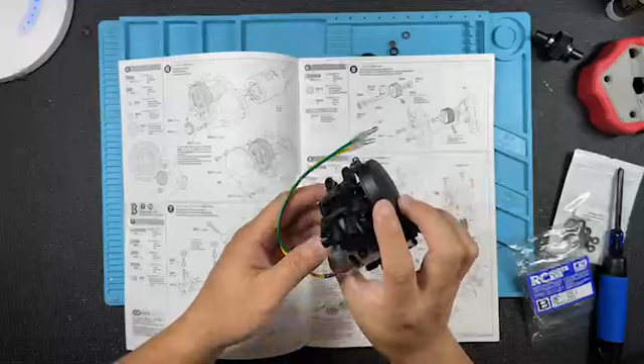Okay, so I want to try to fit everything in the shot. Today, yesterday we went up to step 6. We basically built the rear gearbox, front gearbox, and motor. So this is what we did, steps 1 through 6 yesterday.

Let me try turning on this light, see if it helps. I have one more light today. Okay, so added a little bit more light on this side, so that's good. Let's see if I can drop this down a little bit. Okay, let's get started.

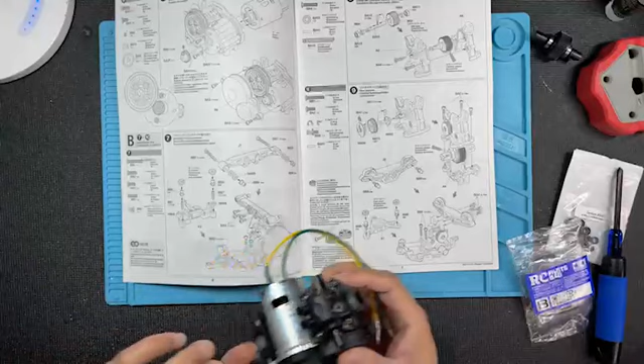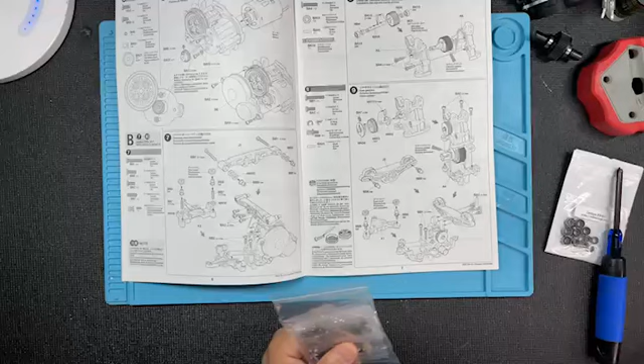So we're gonna start at step 7, obviously. Yesterday we did 1 through 6, so it looks like we're still going to need this, so I'm going to keep this around. Let's go ahead and open bag B. For steps 7 through 10, we're going to use this bag, all of the parts that are in here.

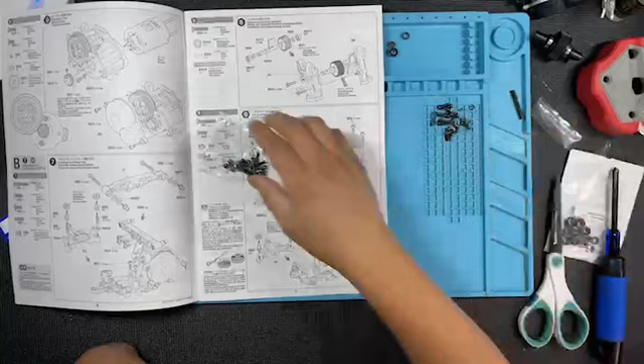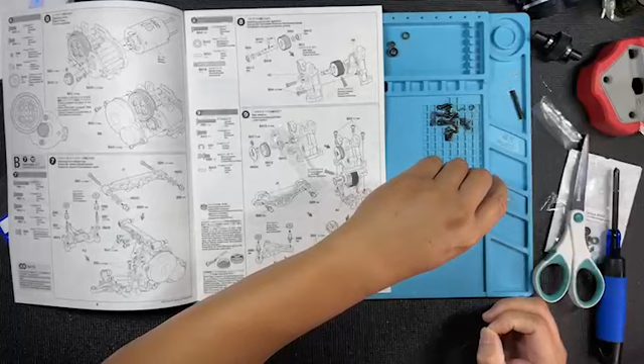It comes with some bearings and a shaft. I know we're not going to need the bearings, so let me just put those aside. These I will put right here. There's a third one. Then all of the screws, let's try to lay them out right here. I'm not sure why they're in 2 bags, so we'll just try to keep them separate, just in case that was on purpose.

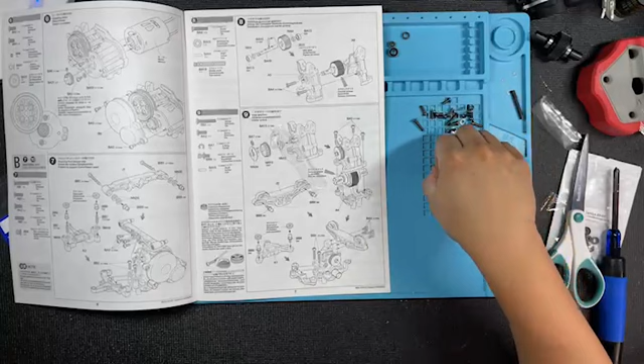Let's see, these are all just regular screws. These have some longer screws. I see some screw shafts, some ball ends, and some nuts. So this bag is a little bit different than the other bag.

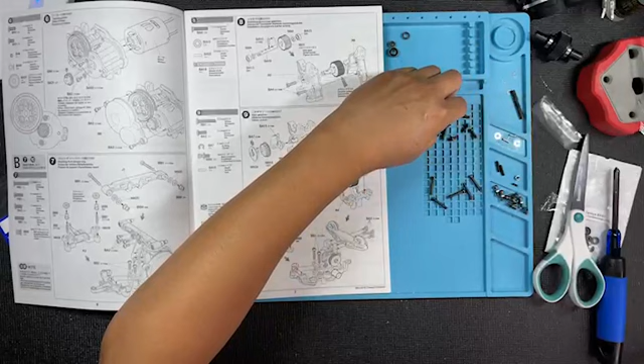All right, I see a couple pins there. If you watched last night's stream, you know that I had a lot of trouble with a couple shafts yesterday, and it held me up for about 20 minutes. But I got over it. Basically, I was using a shaft that was too big, and it turned out there were pins that were a little bit too big, and I couldn't get it into the slot, so it held me up for about 20 minutes. So let's not do that today.

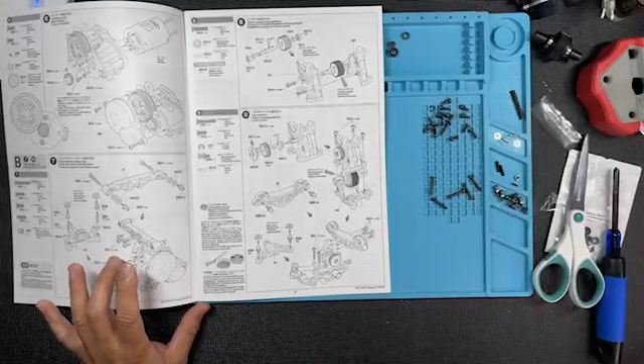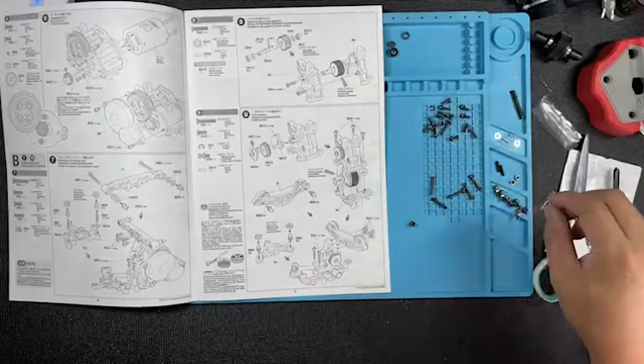So let's start over here on top. Let's find this piece J1, and then I already know what the N tree looks like. Been using that yesterday, and then we're going to need these ball studs as well. So I got the ball studs here. There's 1, there's 2. This is the N tree right here. You can see there's another one. I'm going to try to use up this one first.

And we need 4 NN20s, and that is going to be these 2. I guess it's these 2. NN20, NN20. Oh, well, I'm going to need 2 from each tree, it looks like. So there's that, and these two right here.

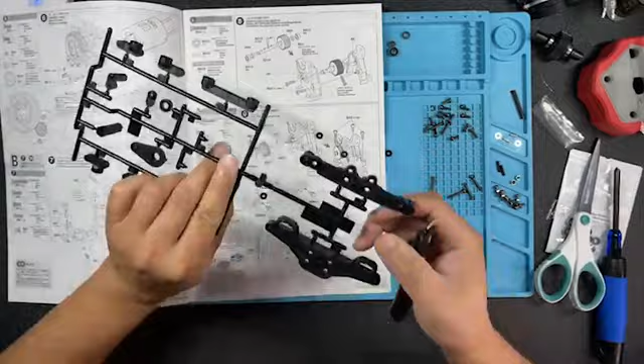J1. Looks like it's gonna be, is this the J tree? Let's see, this is the J tree, and one's gonna be this one.

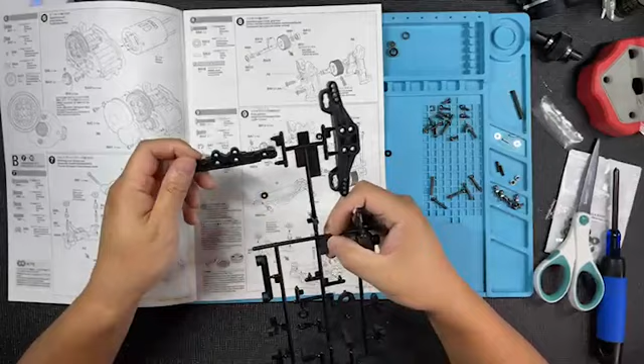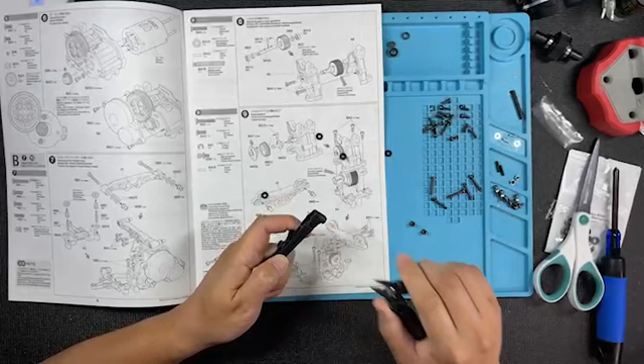Hey Sandwich, how are you? How were things? I went long yesterday. I was trying to finish it all the way to a certain step, and I just kept going, so it went about 2 hours and 2.5 hours.

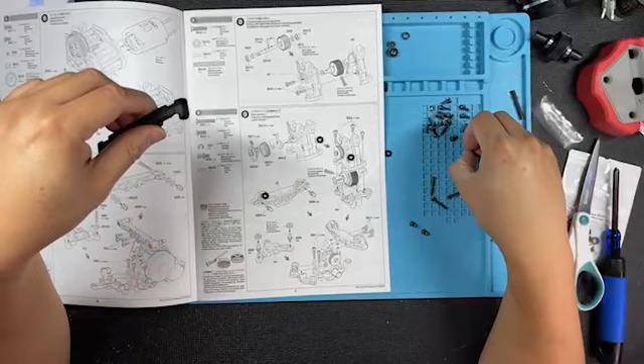Took a while, all because of what happened in the beginning with the shafts. So here's BB1, this screw right here. It's going to go through there. Let me just make sure. I'm pretty sure this is the correct screw. Yep. So it's going to go through this way. I guess it needs to be screwed in.

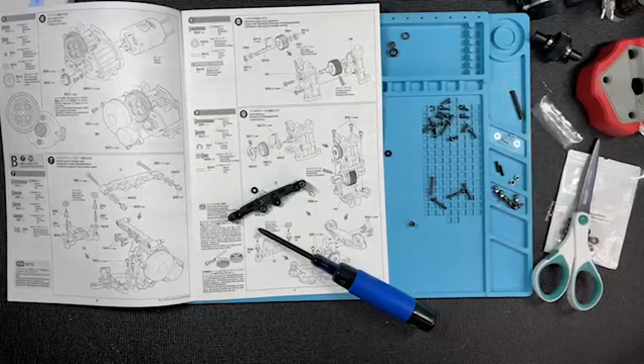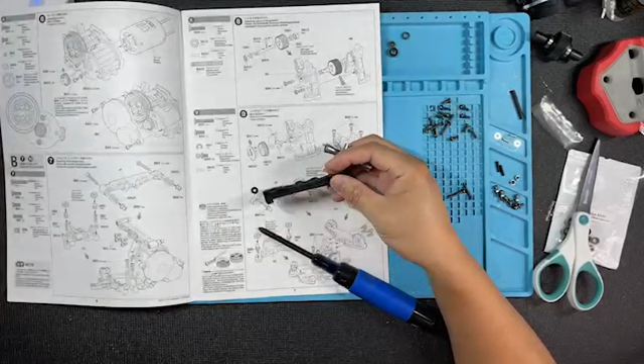So on the other end of that, I'm going to use one of these cross wrenches. It came with one, it's right there. I just have so many of these, every kit comes with one, so I have quite a few.

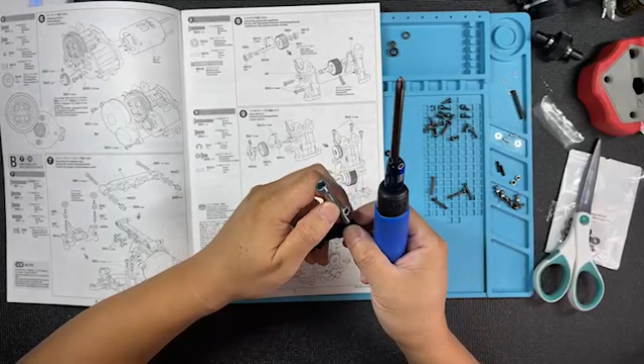Alright, and then same with the other side. Let me just make sure all the bolts are the same. Yeah, there's one that's a flathead, that's a little bit different, but the other ones are the same.

So you got the rustler working and then you crashed it again, or it's still the same as yesterday? Still the same situation. And was the crash your fault?

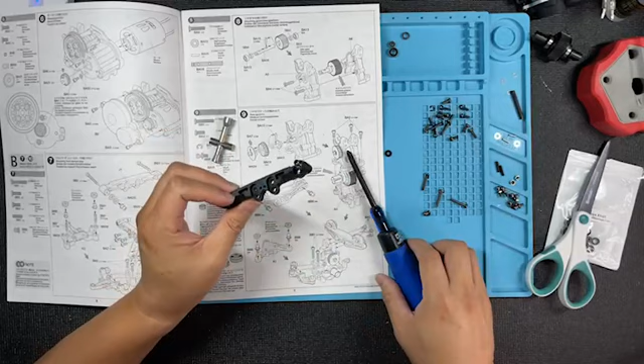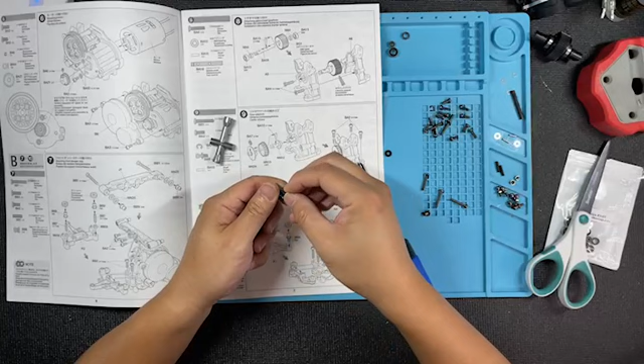There we go. Two spacers. And the ball stud.

There we go. A parked car came out of here. You know, they tend to do that. I don't know why. They should really do something about parked cars. I mean, they shouldn't be able to hit RC cars. I think that happens too much.

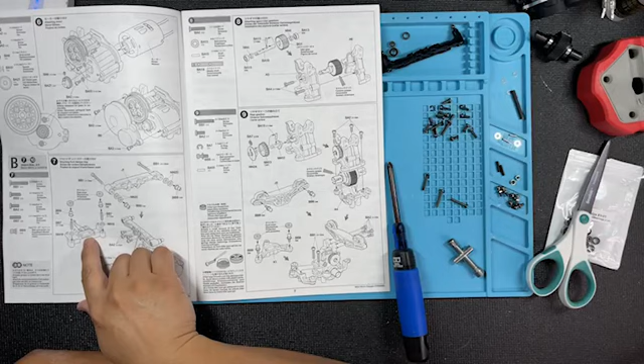All right, put that aside. Now we need K2 and then some other part. I wonder where this is. And a dust cover, huh. Wonder where that's going to be. So we need NN18, we need 2 of those. NN18 are going to be these 2 right here.

Okay. And K2 looks like it's this one right here. Indeed it is. Alrighty.

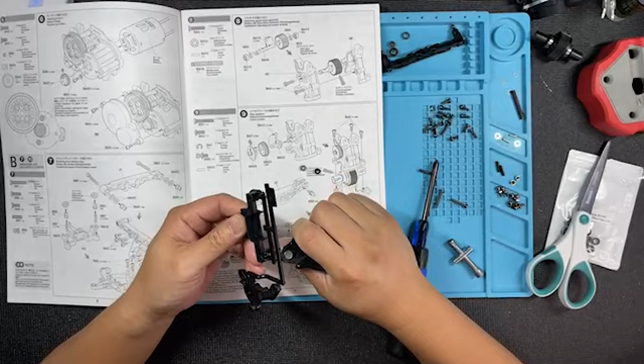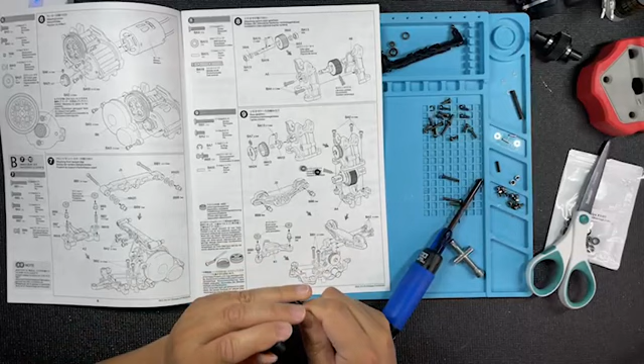So let's see, we're going to use this shaft right here. It's just a screw shaft. It just says screw, but usually screws have a head. But that's okay, we'll just call it what they want to call it. So...

The spacer needs to go on. So this screw has two sides, one end has a hole that is a 1.5mm hex, so you want to point that side up so you can tighten this. I don't know how far I'm supposed to tighten it in, but I'll just see if that's enough.

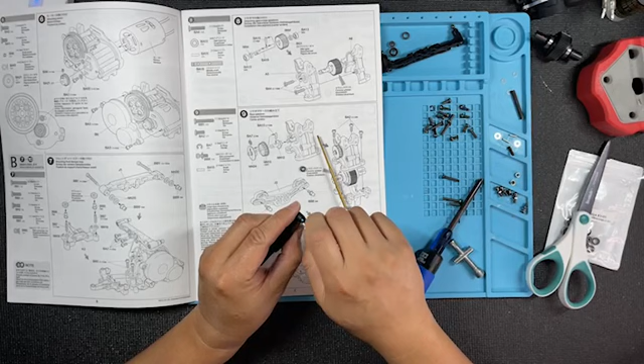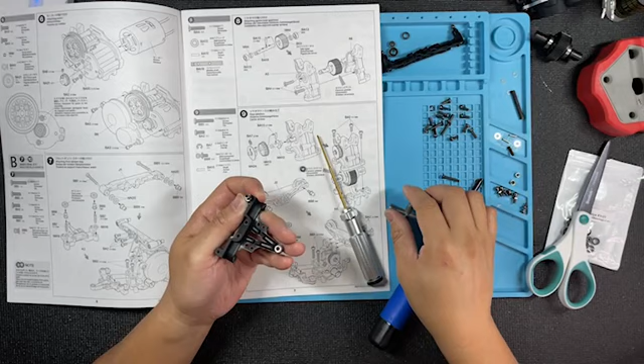And then another one of those ball studs. It's probably close. Alrighty, let's see if I can tighten that. Okay, the screw shaft is not peeking out, so I'm going to say that's probably correct.

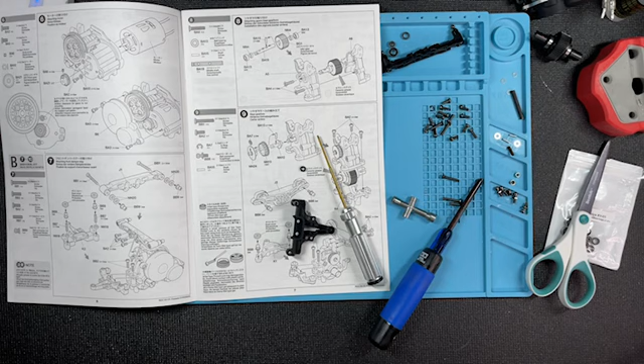Okay, so this dust cover, I didn't see anything that looked like a dust cover. So that's a little bit of a mystery to me. I wonder what those are. Dust cover. I have no idea, I don't remember seeing anything that looks like that.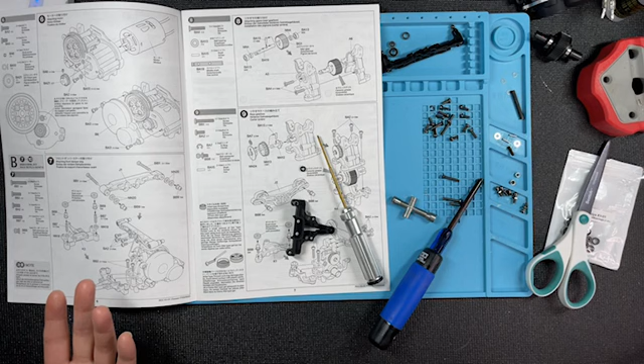Since it is a different shade and doesn't have a part number, I'm guessing it is going to be... oh oops, I put this on the wrong side. I'm guessing it's going to be some kind of foam or rubber rather than something plastic. Yeah, see, I wasn't paying attention and I put it on the wrong end.

So let's pull this out. Again, not using any power tools - anybody can build a kit. And this is actually a fairly difficult kit, so it's a little bit of a challenge.

But so far it's been kind of a fun kit to build. A lot of quirks, a lot of things I haven't seen before, which is interesting to me. All right, like that dust cover, I have no idea what that is, and I don't see anything that looks kind of like a dust cover.

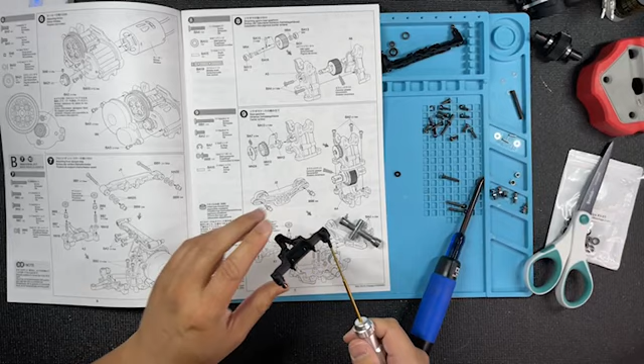Sandwich, you have any guesses what this might be? It's these two kind of spacer looking things. It's a little bit shaded gray and there's no part number and it says dust cover. What do you suppose that is? And where might I find it?

Alrighty. I wonder if it matters that it's there. Is it functional or? Wonder what it's going to be. Let's see.

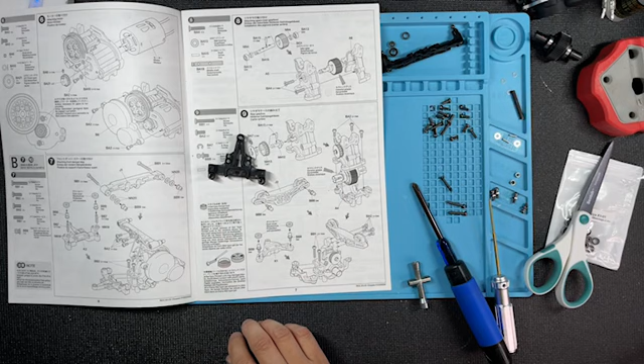Apply grease to screw tip if the fit is tight. Okay, that doesn't help. All right, we'll figure out what those are later. So right now, let's grab the front gearbox - see, it's so small on my end.

Foam rubber piece, yeah, that's what I'm thinking. But I don't have anything left from yesterday, so I don't know where it would be. It wouldn't be any of the other bags. This would be the only bag that it could be in, because this bag doesn't have a letter name.

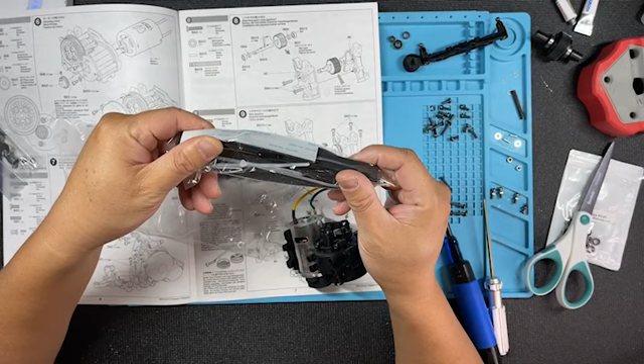So I don't see anything. I guess we'll find out later. Nothing in there. Nope.

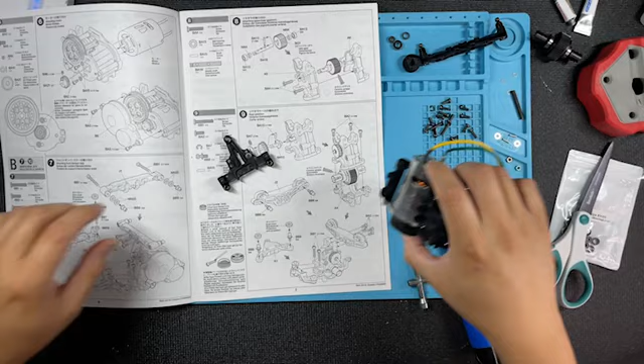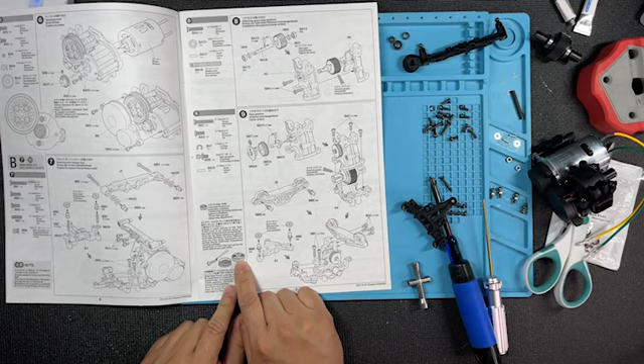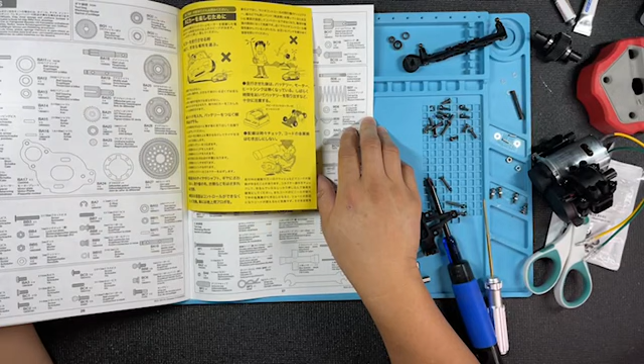I think you missed this yesterday - do you have this? Do you have gel type thread lock? It's called, there's a letter AG on top of the little tub. I don't have one of those. And I looked it up on eBay - our friend, the guy you bought the part from in San Marino, he has that. So I might end up buying one from that seller.

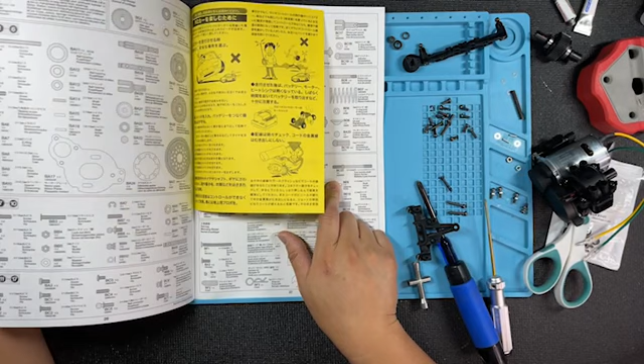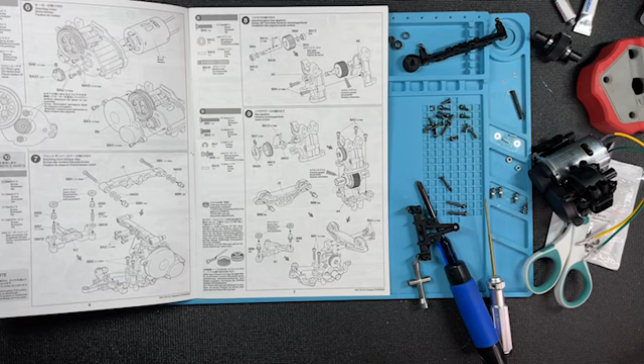Let's see. Urethane O-ring. Gear. Dust cover, I don't see anything that looks... Washer. It's the needle in the haystack. BB6. Huh, oh well. Okay.

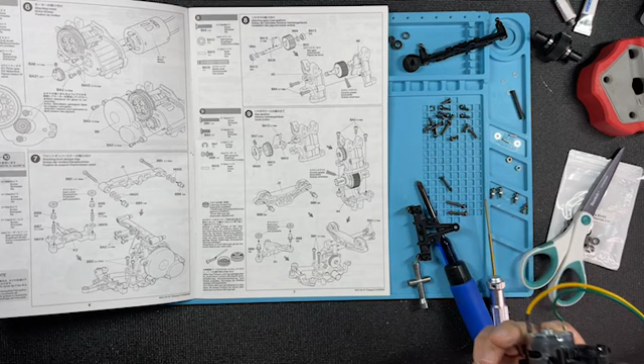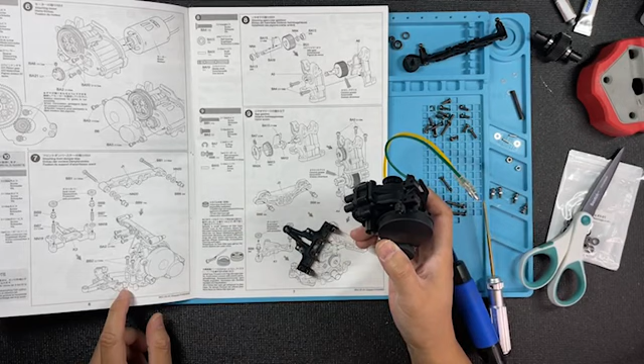So let's grab this, so this is like this. And I was correct, you do sandwich this kind of through here. But you know what, that's pretty prominent, that ring right there. Let me show you.

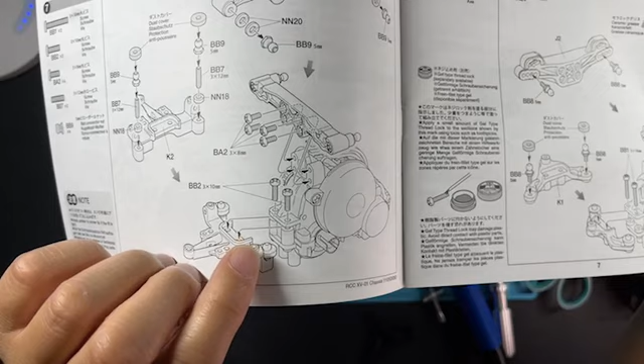So these are the dust covers that it mentions. I don't know if you can see that. Yeah, plenty good. And then when it's on, it goes past the ball stud, the tip of it, and it ends up right there in the collar.

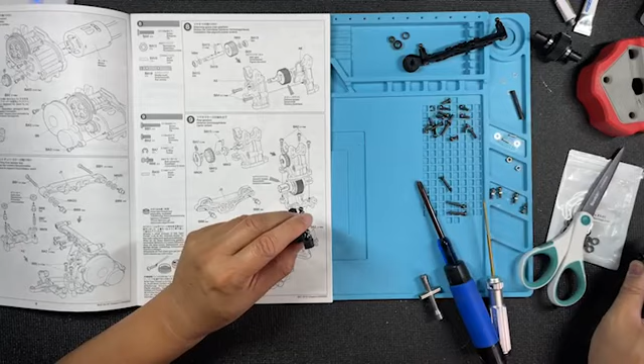So it's definitely something soft, because otherwise it wouldn't pass through. So, well, we'll figure it out later, we'll find out what it is. So this is going to go on like this.

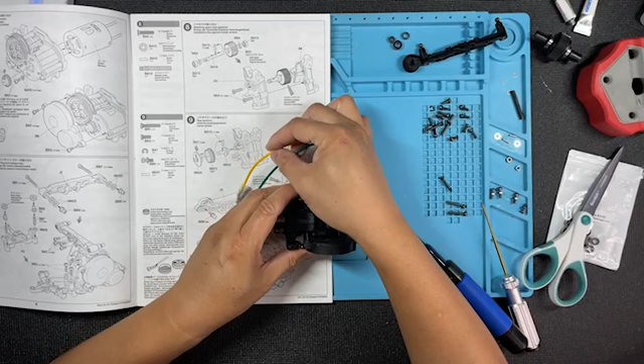And we need to find some BB2 screws, probably going to be these right here. I don't have any - first time.

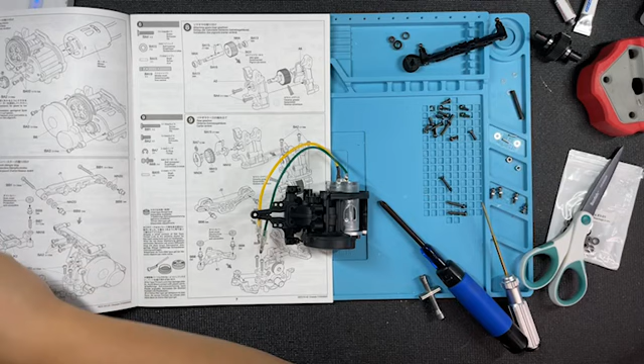Mr. RC, are you building anything? Oh hold on, BB2. Oops, I used the wrong one. Should be this one. Yeah.

I have seen other RC. Oh, what do you stream? What are you building?

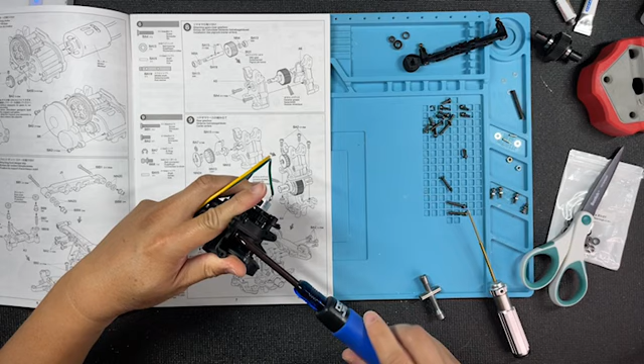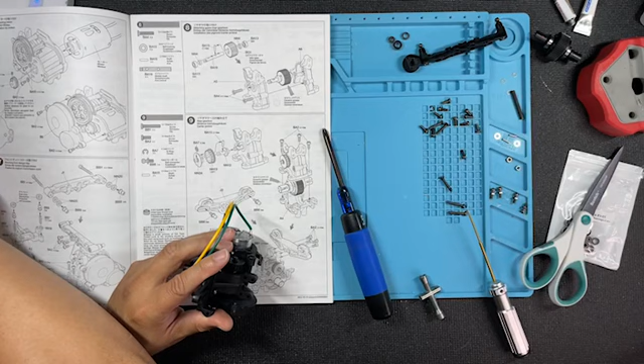Yeah, I got the itch to stream, I think about a month ago, because I got tired of doing post-production for YouTube videos, and I just wanted to try it. I've been meaning to try streaming for a while, and I finally kind of built up the courage. And I did my first stream on YouTube.

I built the Neo Fighter. That was pretty easy, and it went pretty well. And then I switched over to Twitch.

Currently doing a TT02 drift build. Nice, I finished mine not too long ago - the Supra. Which drift kit do you have? RC Car.

How long have you been streaming? I hope you've built up an audience already, and you know, it's worthwhile doing, because I'm right there behind you. I hope you're successful and you're able to build an audience.

Bare bones Supra TT02 kit, putting a bunch of other stuff - oh nice - some custom stuff, converting to two-wheel drive.

Just got affiliate. Oh wow, that's quick - you streamed for 2 weeks and got affiliate? That's nice, I barely have like 7 or 8 followers.

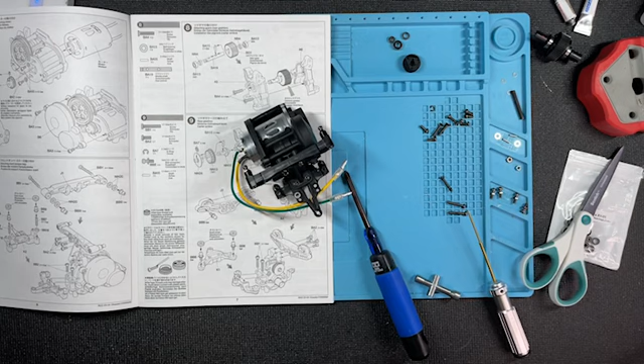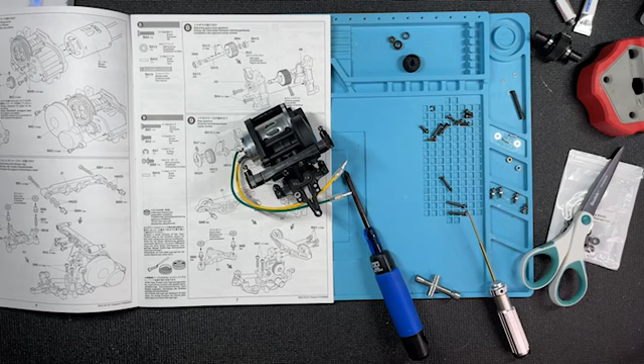Hey, we got the same blue background. Oh no, yours has a matte underneath that's blue. That's cool, oh I see, I see. Very cool, 57 followers, that's awesome. Created. Very nice.

Dually crawler build - wow, that's cool. I tried building a dually once. I couldn't get the right setup - I bought the little adapter, but I couldn't find 4 wheels that would work together, and the guy selling the dually adapter had no clue, so he wasn't any help. I put it away. I'm sure I still have it somewhere, but that's cool. I haven't built a crawler in probably like 3 years.

I'll show you the last crawler I built here. I think this was the last one. So I started with this Hot Racing aluminum chassis, and then I just kind of bought a bunch of links and stuff, and built it up with the axles. I don't remember how much I spent on this thing, I really don't remember, but everything's aluminum. It's kind of heavy, but this is pretty cool. I think that was my last crawler.

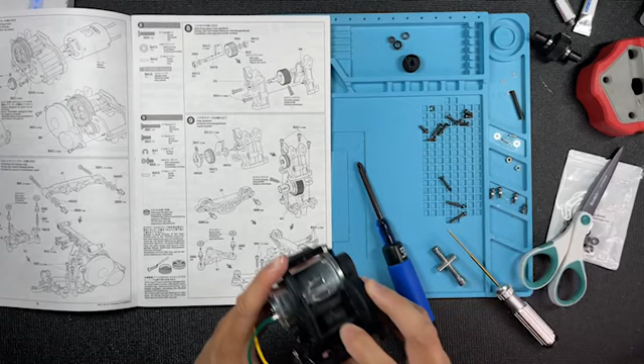And I just sold a bunch of them - I don't have time. Awesome pit mat, custom.

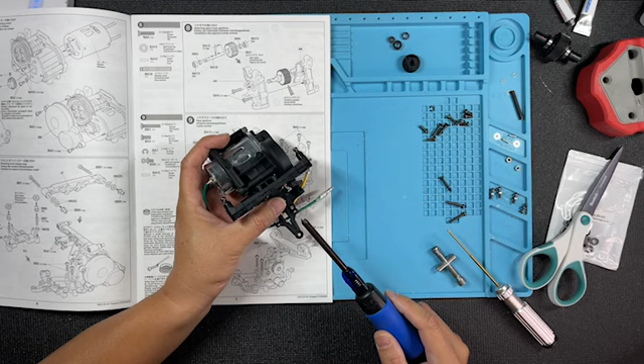Oh jeez, okay hold on. I can't look it up on eBay right now, it only goes back not too long. I don't know how to search for it, but I'll find out.

I have it in the box over there somewhere, and it was just a really simple adapter. I'm sure, you know, it's been like 2-3 years, people have come up with new things already, or even that gentleman has come up with something new.

All right, so I think we're done with step 7.

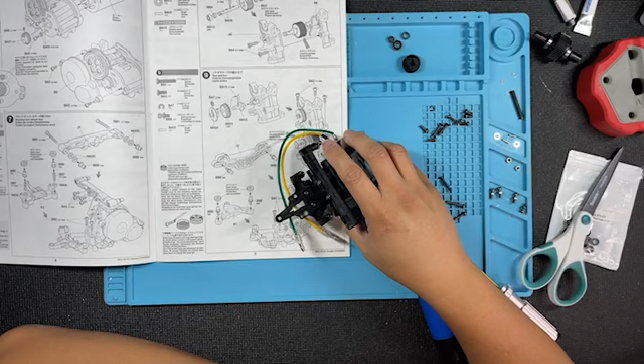Okay, so we're done with step 7. So let's jump over to step 8, and it looks like I'm going to start with this gear right here, this shaft, and then 4, and then 4.

Oh, I just finished building a TT-02 on here on Twitch. It was the Subaru WRX. It came out really cool.

I want all this. Okay, I'm pulling this other shaft and a lot of Dremel work. Yeah, so it's for sure.

For sure, I think Mr. Sandwich did something similar with his Subaru WRX TT-02. He described it to me, explained it to me, but I couldn't visualize it. Something about the upper arms trimmed off a little bit to give the suspension a little bit more travel. So I guess Dremeling Tamiya kits is a universal thing, a lot of people do it.

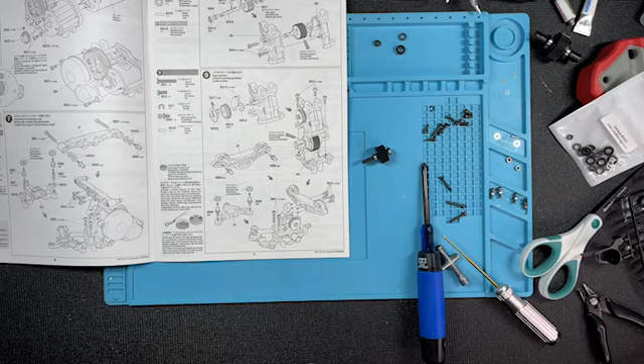Let's see, A5, A6. So this is A5, and this is A6.

I have like 16. Oh cool, very nice.

So what do you like to build most? Do you do on-road, off-road, crawlers? You know, what do you like the most?

So this end is going to go through here, and it looks like this is going to be left open, so I don't have to put any grease on just yet. So let me close that up and find those two screws. I'm going to assume it's this one right here.

How do you guys decide what to Dremel? That's what I want to know. You guys just look at it and say, I need a little bit more room right here, clearance right here, and you just go at it. How do you know it's not going to affect the rest of the car, or break the whole thing?

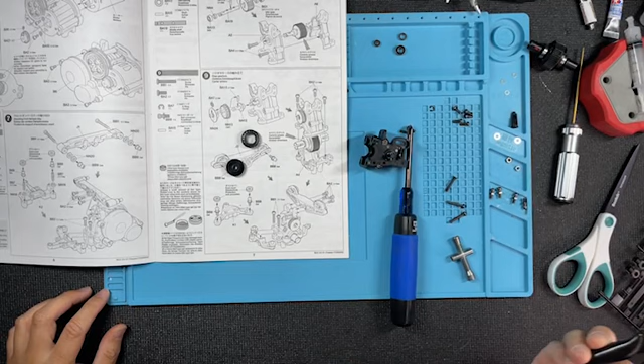I built one of those into a Porsche 911, the Martini one that was at the Festival of Speed. I don't know if you know that one. Oh Raymond, I gotta check that out. Hold on, sorry, I have the...

Okay, I can't find him right now but I'll look for it. And ID for the slider. Okay, yeah that's cool. Yeah, it's the silver one with the orange fluorescent red skirt. I think if you saw it, you'd know exactly what I'm talking about. Oh I forgot NN12, just that right there - that goes on before the pin. TT-02 slider, okay.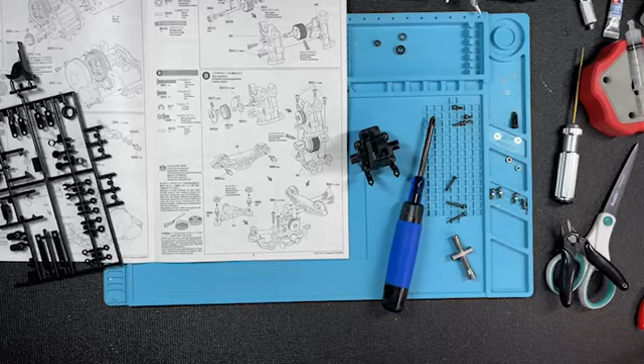Okay, so I need second to last hole. Oh, you know what'd be a cool build? The Neo Scorcher, the Neo Fighter. That'll be a cool kit, a 2-wheel drive buggy, it's not expensive, and I think it's going to be a pretty decent performer. I think you'll have fun, and the body's easy.

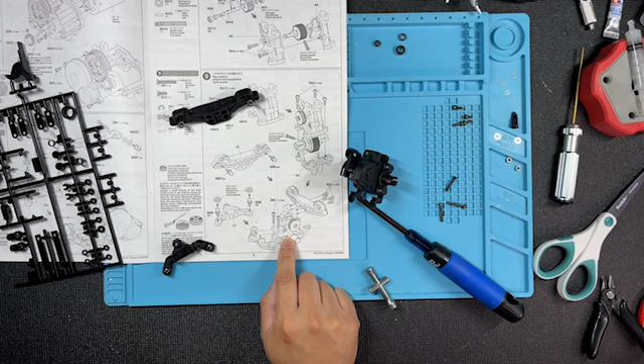Let's see, so now I'm over here, and I'm going to put this through here. Now, how is this going to be possible? Pretty tight fit. Then BB1 should be this one. Nope, should be these two. Yep, there's one, and there's the other one.

See what the message is. Earned a new emote for enabling 2FA. Huh, I don't know what that means.

Cool, cool, cool, I'm just looking at something. Very cool. Drift build, I'm just looking at Mr. RC's kit build here, it's the TT02. Wow, ooh, he streamed outdoor driving, that's cool, haven't done that, haven't thought of that before.

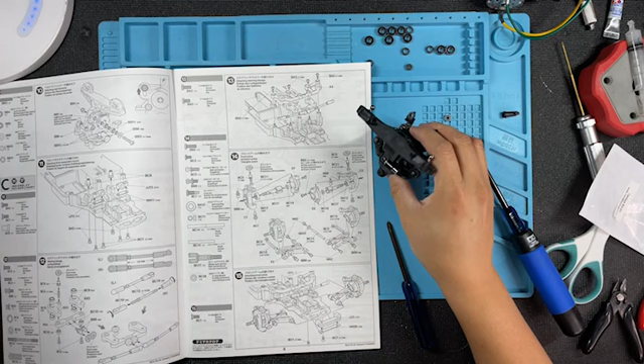All right, now we can put these away, I think. I'm pretty sure now. Okay, and put it over here. Now we need the chassis.

So I've been streaming for an hour and 13 minutes. Let's see how far I can get. Hopefully I can get through all of this and stop at a point where it makes sense. I mean, ideally it would stop here, but I don't know if I can get that far. We shall see.

So there is the chassis, and we're going to be working on this end, the front end. So we need to find bag C now. We've used up bag B. Progress is being made.

Bag C is this green one right here. Let's see, it looks like I've cleared up all the parts. So, let's see if I can.

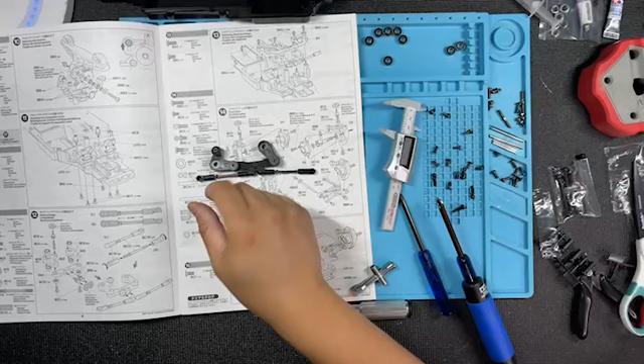All right, so when you're making adjustments and you want to make this rod longer, this rod longer, you would spin it the same way, and it's kind of easier to keep track of.

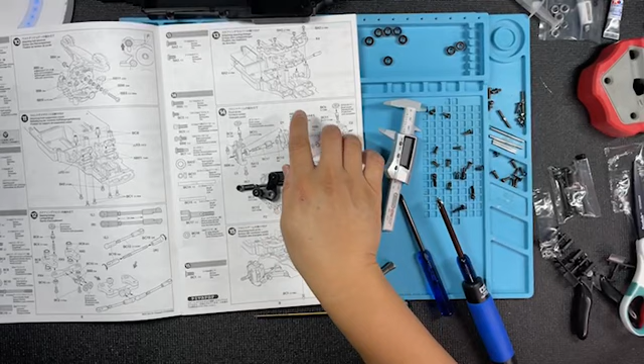All right, so step 13, we're going to put this onto the chassis, and we're going to need K4. This one right here - these parts are really easy to spot. I've never seen parts that look like this before, so it's kind of a cool kit.

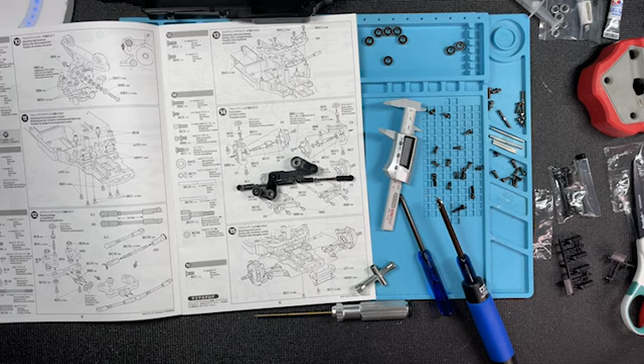I'm enjoying this kit. I mean, I've built so many TT-02s, I think I built like 6 already, and countless other Tamiya kits and all the other kits. I like something challenging, and this is definitely challenging so far. Probably not the hardest kit I've ever built - I want to say the hardest kit I've ever built was the B64, and I say that because there's a lot of shimming and stuff to build it correctly.

BA3, so let's do that. I'm sure this is not the hardest kit in the world - definitely probably not even the hardest kit. I don't even have to say probably - definitely not the hardest kit even in the Tamiya line of cars. But I think it's right up there.

So this goes on to this hole. How though? How would that? Oh, it comes through there - that's how.

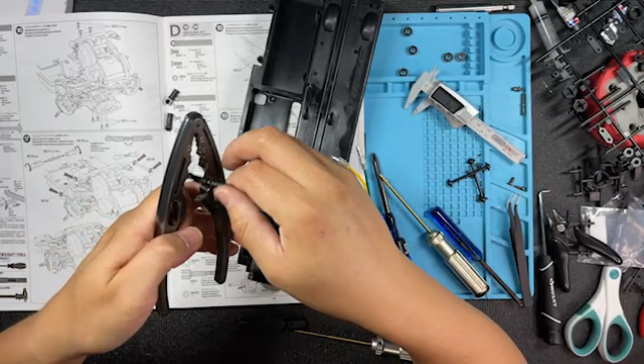So this gap is supposed to be 8.5 millimeters. Let's see how close I got. I went a little bit too far, so I need to back this out. So this side was lefty-tighty. Oh, righty-tighty, I think. Yeah, righty-tighty. So I'm going to turn this left. Okay, and then this side, I'm going to turn it right. Let's see where we are.

So let me back this one up one more revolution and see where we are now. 8.82. I think that's pretty close. I won't be able to tighten it... well, I guess I can. I can spin this one 180 this way, and I can spin this one 180 this way. I should shorten it. Yeah, 8.38, 8.4. So there you go.

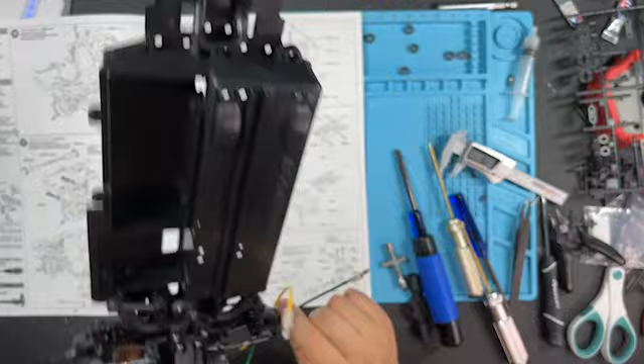Just going to turn this until it kind of seats in there. All right, and now this. All right. Action's super good. Wow, this is really a nice car. Something's catching, but I'm not sure what it is. Okay, we'll figure it out. All right, let's finish it up.

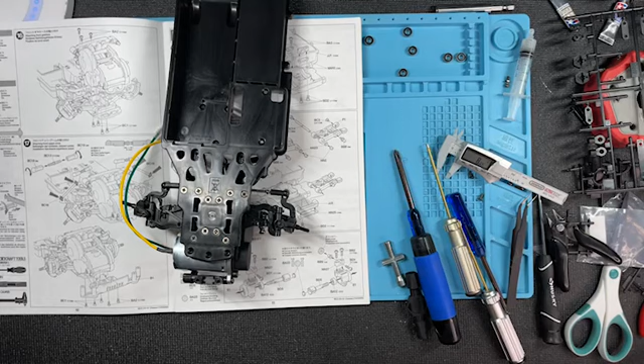Just need to put this B1 on the bottom and we're done for today. B1. Should be this right here. Yep. Okay.

So that's going to line up right there like that. Super clean, 3 screws here and 2 screws here. Where did these 2 screws go? Oh, right there, that's cool. It looks really clean. Always have a trash can handy.

That's a flathead. I like the way this car is coming together. I just like how everything is really clean and everything makes sense. Unlike the TA-03 that I just finished building, it had a lot of screws as well, but it just seems like they're kind of not doing anything, or not doing anything that couldn't have been done in a simpler way. I don't know if that makes sense or not.

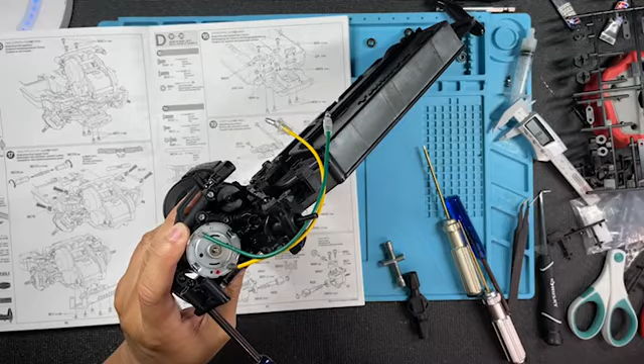The TA-03 seems like it was just different for the sake of being different, and not really in a practical way. I think the way this kit's coming together is pretty cool. Obviously decisions are made for strength, for this car to be solid, and you can kind of tell that as you're building this.

The only thing I don't like is this right there, the battery compartment being on the bottom of the chassis. That's always a problem. Either the battery will fall out or you're going to get a whole lot of dirt in the compartment, one or the other. Neither one is pleasant.

Okay, wow, all that just for a front end. And isn't it interesting, the motor's all the way to the front. It's not even like right here or right here, it's all the way to the front, in front of the front axles. That's cool, that's totally different.

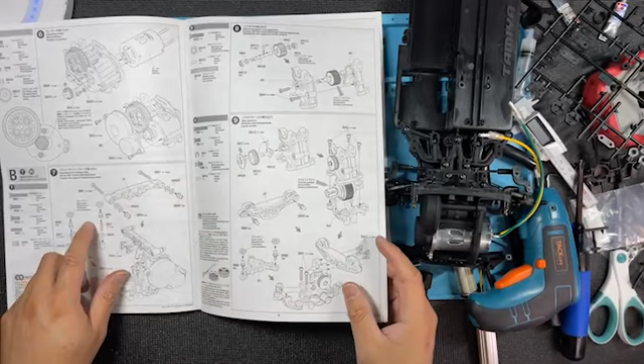So it looks like I'm done for today. Let's recap how far we came. We started on step 7, I believe, and we went 7, 8, 9. We went from attaching the front damper stay to the rear gearbox gears, rear gearbox, belt tensioner, the front suspension mount, steering linkage, front arms, attaching the front arms, attaching the front gearbox, and then step 17 was attaching the front upper arms.

Super cool, I really like the way this kit is coming together. I like the design, I like the plastic. Everything just looks quality, and it's been so much fun to build. It's been more sophisticated, but not difficult. There hasn't been any impossible things. I've made a mistake a little bit before, so far I've made some mistakes along the way, but it's been easy to recover. So I'm really, really enjoying this kit right now.